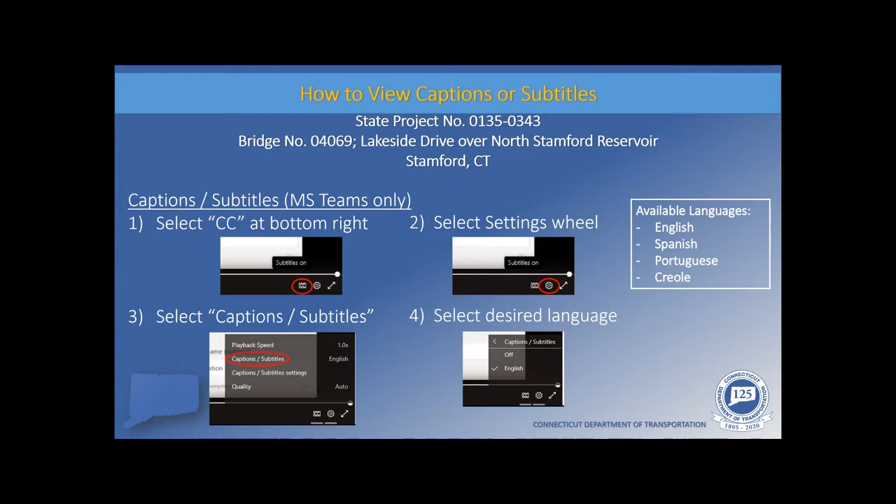Good evening, ladies and gentlemen. On behalf of the Connecticut Department of Transportation and the City of Stamford, it is my pleasure to welcome you all for attending this public informational meeting for State Project number 135-343, Rehabilitation of Bridge number 04069, Lakeside Drive over North Stamford Reservoir, located in the City of Stamford. My name is Priti Bhardwaj, and I am the project manager from the department, and my team is joined here this evening with the City of Stamford to discuss our preliminary design proposal for this bridge. We hope that you will find this presentation both interesting and informative.

I would now like to explain the format and agenda for tonight's meeting. I will be explaining how you will be able to interact with the project team, and how the project is funded in the Federal Local Bridge DMS, or Design Managed by the State program. We will be having some welcoming remarks by the City of Stamford. I will then introduce the project design team, including the department's front office leadership, the department's design team, and our consultant liaison engineering team. This will be followed by a technical presentation of the design, which will include the condition of the existing structure, purpose and need for the project, and the recommended design solution, which has progressed to a 30% design completion. As part of the department's public outreach program, it is at this point that we are now reaching out to you, the public, while it is still early in the design process, to receive any comments and concerns and also answer any questions that you may have. And lastly, we will have the live question and answer session.

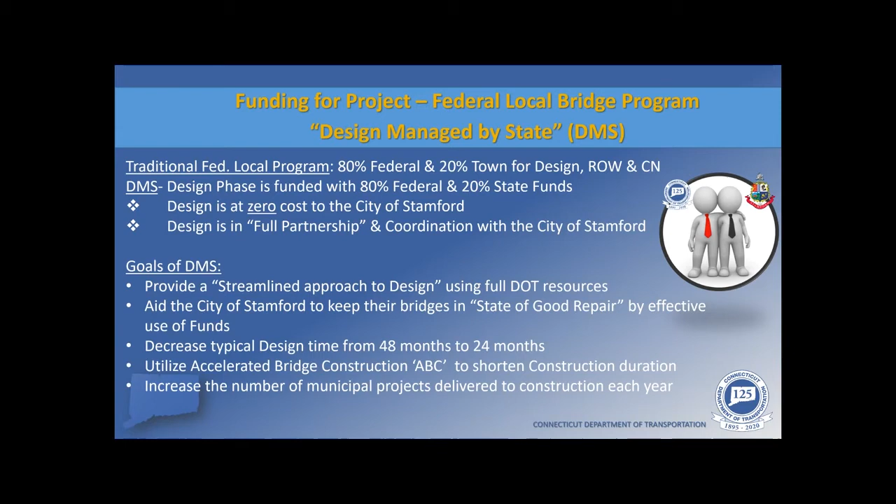The Connecticut Department of Transportation performs safety inspections for all bridges over 20 feet in length at 2-year intervals, and as a result, the Lakeside Drive Bridge was identified as one of the bridges in the city that needs to be rehabilitated. Traditionally, the city selects and retains a bridge design consultant to develop the design, and they are responsible for creating construction bid documents with the city, covering 20% of the design costs.

As the Connecticut Department of Transportation previously mentioned, the department has offered the DMS program to the city, where the design is managed and 100% funded by the state. The state's pre-selected consultants are knowledgeable of the design process, resulting in both an early completion of design and construction, which translates into some added cost savings.

The city began meeting with the state in June of 2018 to get a better understanding of how the program works and how it would benefit the city. After several more meetings, the city recognized that this program would be a good joint effort and agreed to go forward with it on this project.

While the design efforts have been led by the state, they keep the city in the loop on all aspects of the project, including providing us with various technical alternatives along the way, along with the pros and cons of each option and recommendations. They have also informed us that the city will be making the final decision on all design aspects of the project in terms of aesthetics and matters related to traffic and staging during construction.

So, ladies and gentlemen, we are finally ready to present our technical portion of the presentation, and you will be hearing a lot of bridge lingo throughout the presentation. Therefore, I am about to give you a 2-minute crash course on some of the structural elements on a bridge.

On the diagram shown, the deck is the riding surface of the bridge. The parapets, or sometimes bridges can also have an open rail system, help prevent errant vehicles from going off the bridge. The beams, or girders, are the supporting structural elements designed to support vehicular loads, the self-weight of the bridge, and any environmental loads such as wind, seismic, etc. The parapets, the deck, and the beams or girders make up the superstructure of a bridge.

The abutments and wing walls are the end supports of the bridge, and piers, if there are any, are the intermediate supports. The abutments, wing walls, and piers make up the substructure of a bridge. The substructure not only supports the superstructure, but also helps in transmitting loads from the superstructure down to the bridge foundations.

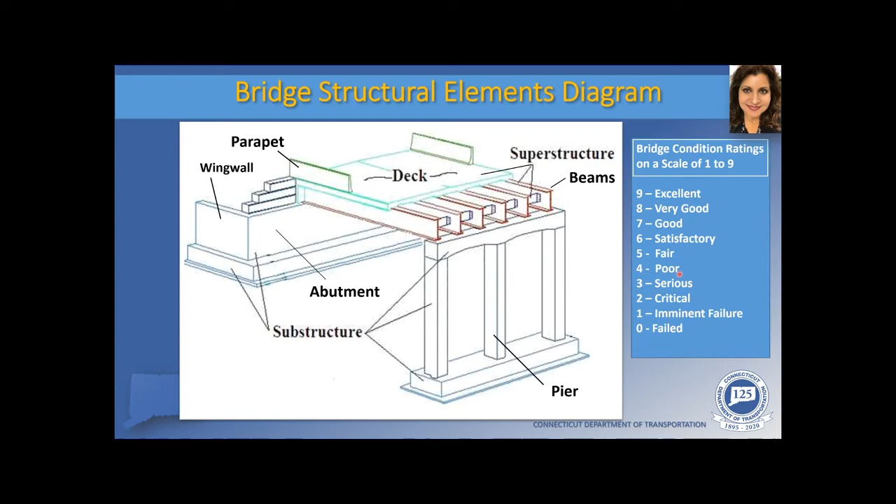Thank you, Priti. Good evening. My name is Danielle Foucher, and I will be presenting the technical portion of tonight's presentation for Bridge 4069, Lakeside Drive over the North Stamford Reservoir in Stamford, Connecticut.

Here's a map of the project site. The bridge is located about a half a mile east of Route 137, just over the North Stamford Reservoir on Lakeside Drive, which is located right here.

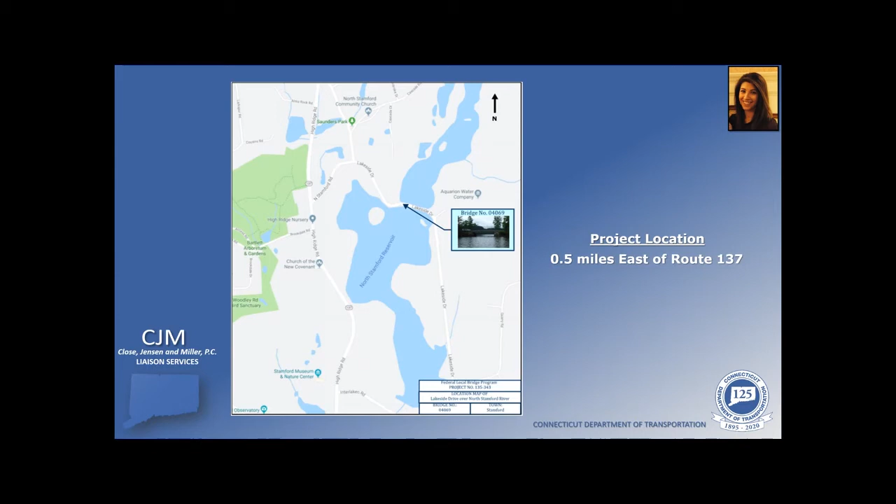Here is an aerial view of the project site. As you can see, the bridge goes right through the middle of the North Stamford Reservoir, and the North Stamford Cemetery is located on the northwest corner of the project site.

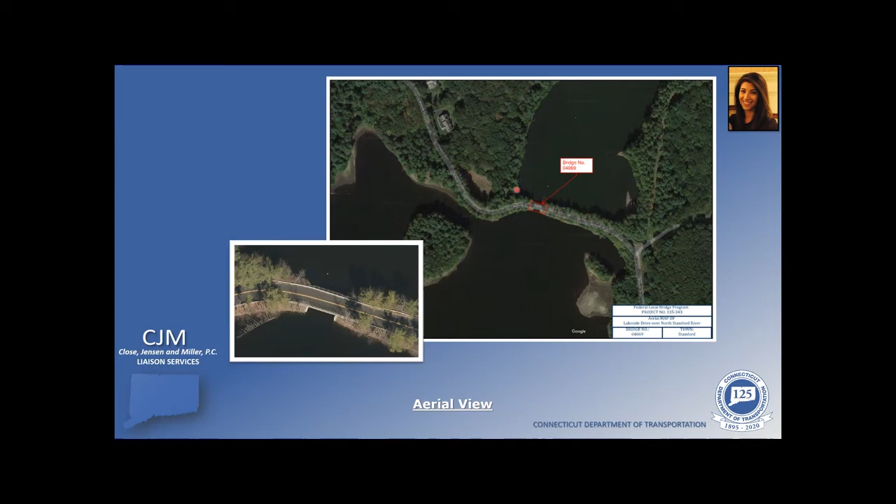The existing structure consists of a single-span steel multi-girder superstructure with a reinforced concrete deck, supported by stone masonry abutments. The existing structure was built in 1936 and reconstructed with a superstructure replacement in 1993. The bridge has a total structure length of 40 feet with a curb-to-curb width of 23 feet 3 inches and an average daily traffic of 5,430 vehicles per day.

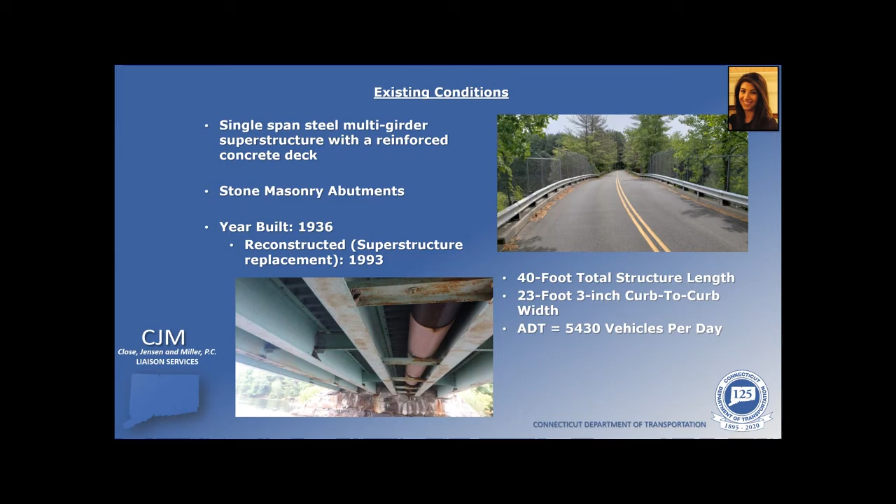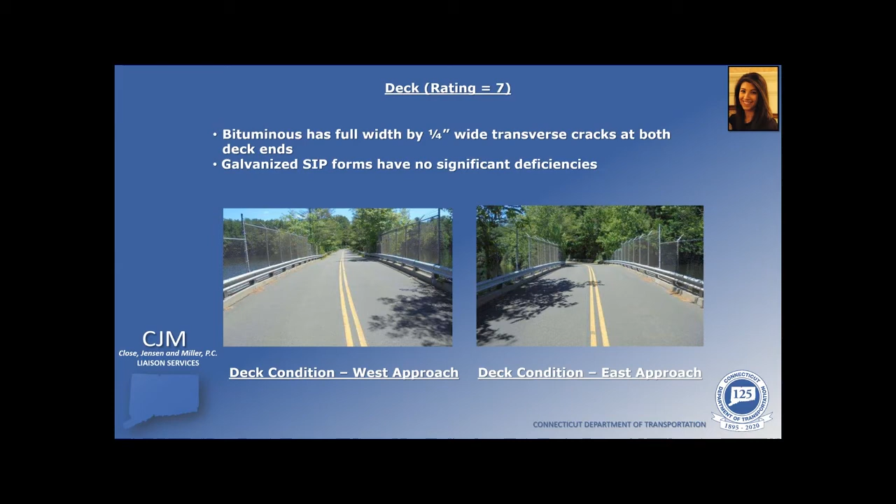The existing deck has a condition rating of 7, which is good. The bituminous has full width, quarter-inch wide transverse cracks at both deck ends, and the galvanized stay-in-place forms show no significant deterioration, which I will show you in the next slide. As you can see here, the stay-in-place forms show no signs of deterioration.

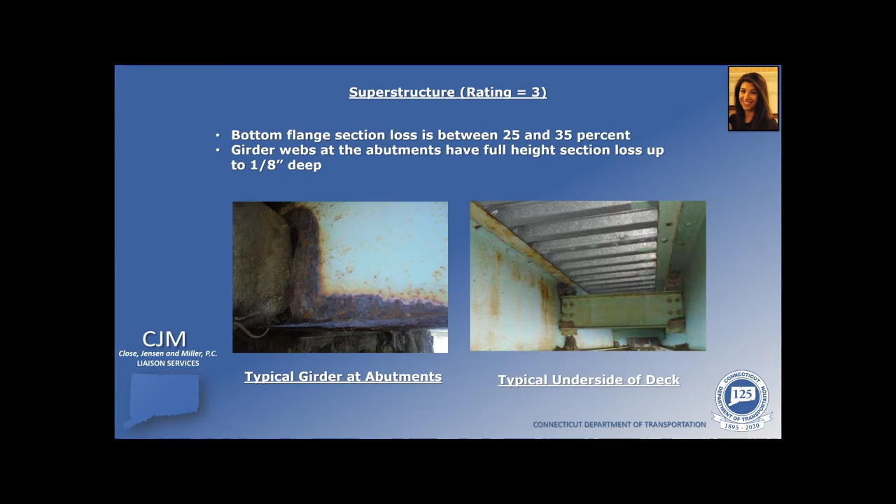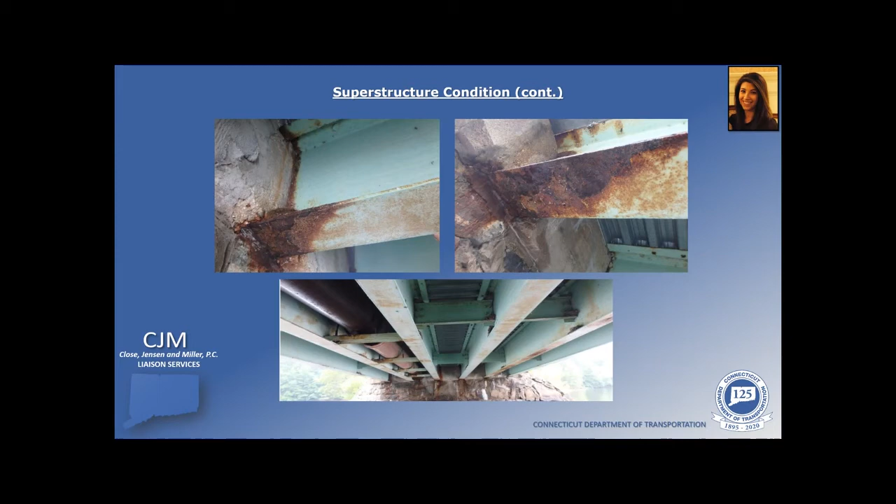Here are some more photos of the superstructure condition. As you can see in the two top photos, the bottom flange shows large areas of section loss.

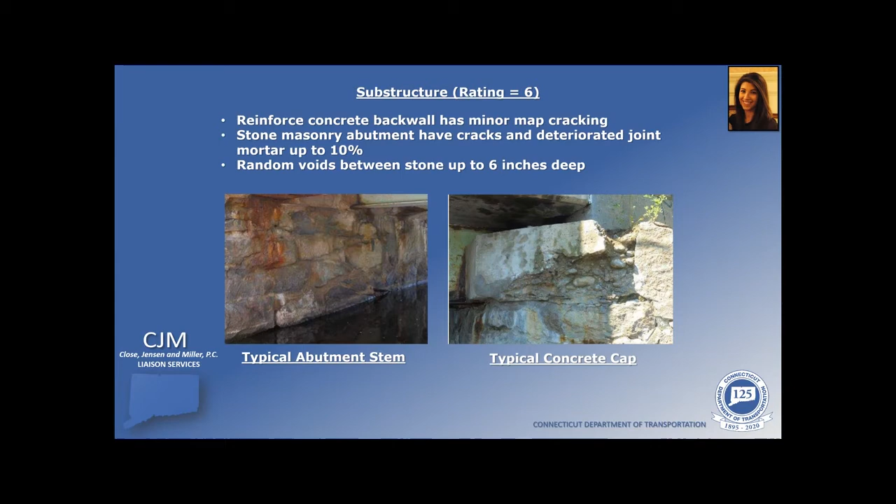The substructure has a condition rating of a 6, which is satisfactory. This rating is mostly due to the deterioration of the concrete cap, shown in the photo on the right. However, this will be replaced in the proposed project. The stone masonry abutments have cracks and deteriorated joint mortar up to 10%, and there are random voids between the stones, which are up to 6 inches deep.

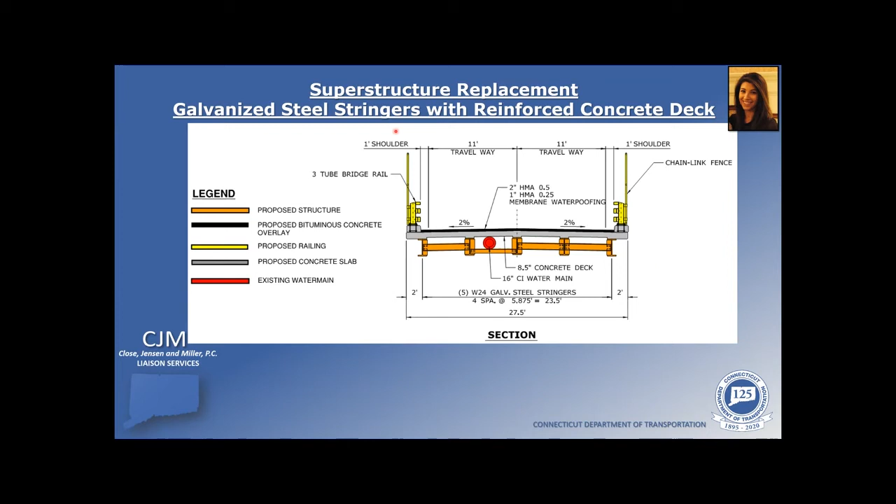The proposed project will consist of a superstructure replacement utilizing galvanized steel stringers with a reinforced concrete deck. The bridge rail and chain link fence will also be replaced to the most current design standards.

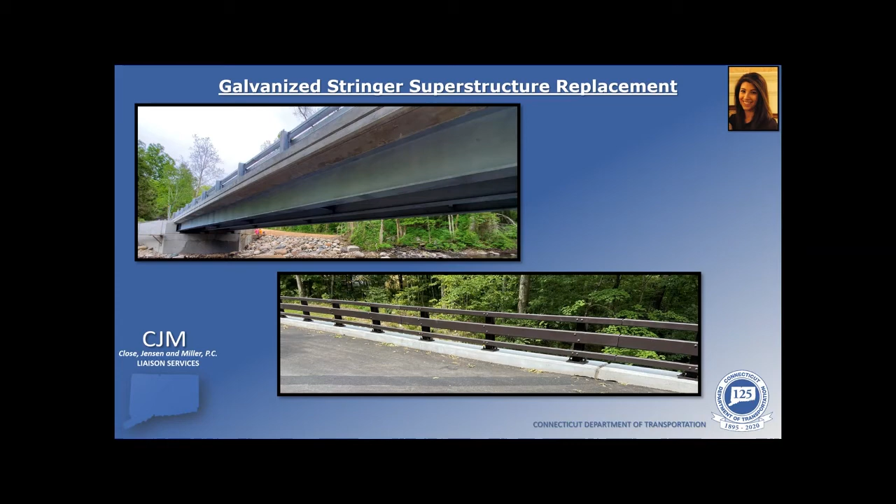Here are a few photos of what the superstructure will look like. In the top photo, you can see the galvanized steel stringers that will be utilized. And in the bottom photo is an example of a crash-tested bridge rail that might be utilized on this project. However, behind the proposed bridge rail will be a chain link fence to protect from the reservoir.

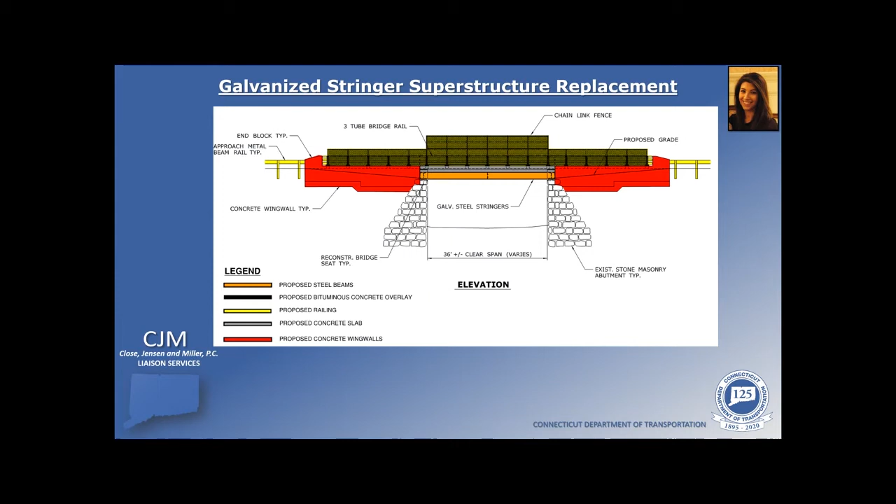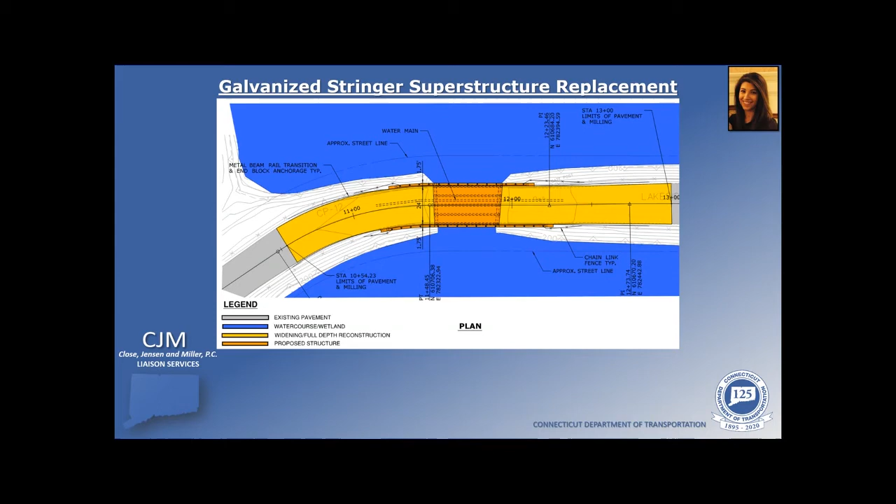As for utilities, the only utility found within the project limits is a water main that is located between two of the existing stringers. The existing water main will remain in place and in service during the entire duration of construction.

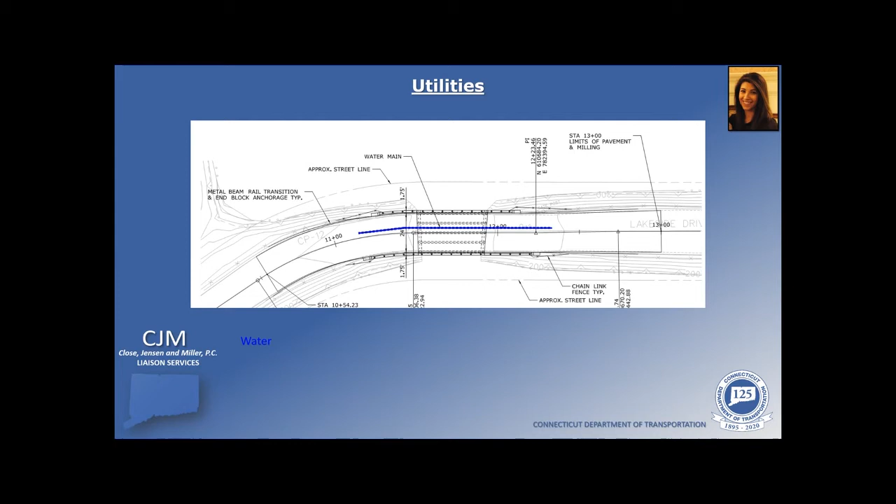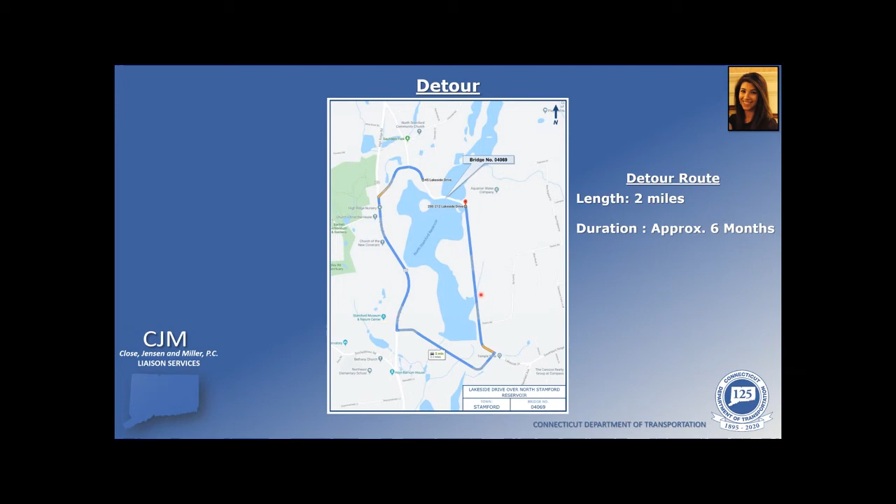We anticipate that construction will take approximately 6 months to complete, and we anticipate starting construction in spring of 2022. This project will be funded by 80% federal funds and 20% municipal funds. The estimated construction cost is $1.24 million, which will result in a municipality share of $248,000.

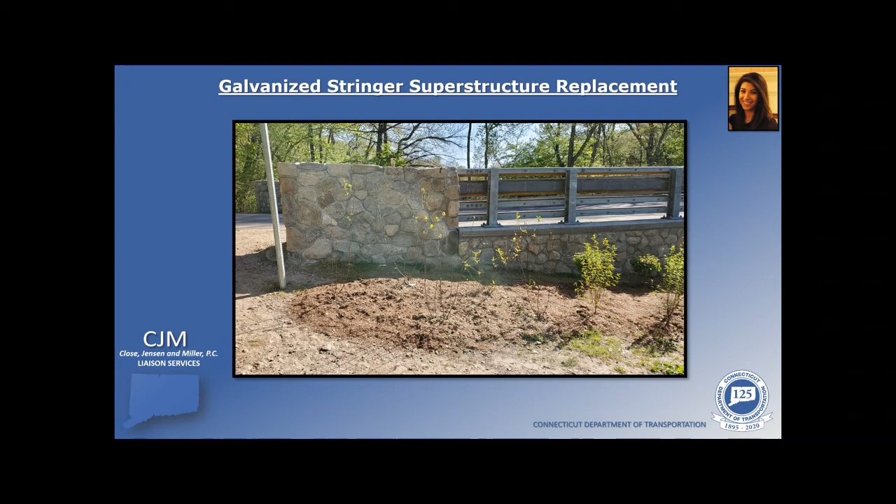Another question: can timber guide rail be installed? Danielle from CJM answered that at this time they're planning to install a metal guide rail to match what is currently out there at the site. However, down the road, if the town would like to go to timber guide rail, they can definitely investigate that and incorporate it into the plans.

Savanko from the city of Stamford added that on another project they're doing, they had a comment where they wanted to replace the steel rail with timber just for aesthetics, and they are incorporating it in that project. So if it does come up later on, they certainly can look into it, even though there's a cost differential, since timber is more expensive than steel, so they'd have to factor in the additional cost.